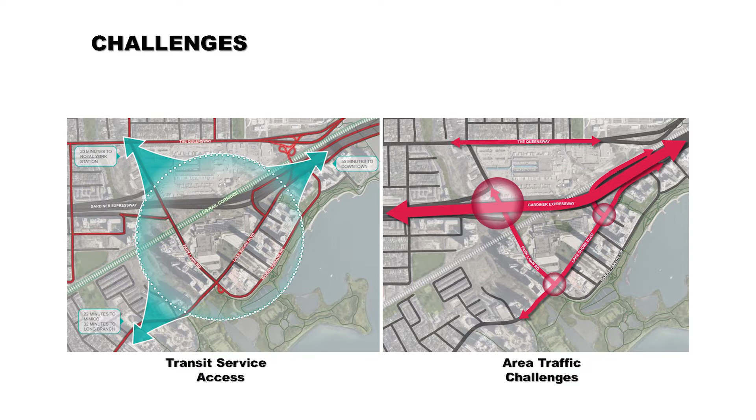We're aware of the challenges people in this area face trying to reach higher order transit, and that level of accessibility isn't probably what you would like today. We're also highly aware of the traffic congestion and issues faced in the community daily, largely because of the overspill from the Gardiner Expressway along Lakeshore and Park Lawn. These were central elements we wanted to address going forward in the master planning, because we believe those are responsibilities we need to answer, not only for the development itself, but for the community at large.

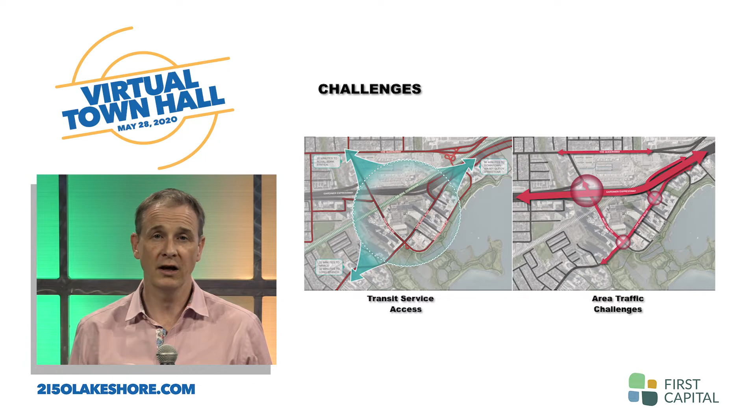So we had three big ideas we were moving forward with. We wanted to create new transit options for the neighborhood at large and for the development proposal. We believe we can do that. We wanted to address the traffic congestion in a meaningful way that actually enabled the neighborhood to be positively benefited by the interventions we could create. And lastly, we wanted to create a walkable community that could enable the whole of Humber Bay Shores to leverage the development opportunity and the mixture of uses planned within the development, on a really grassroots, walkable, on-foot basis.

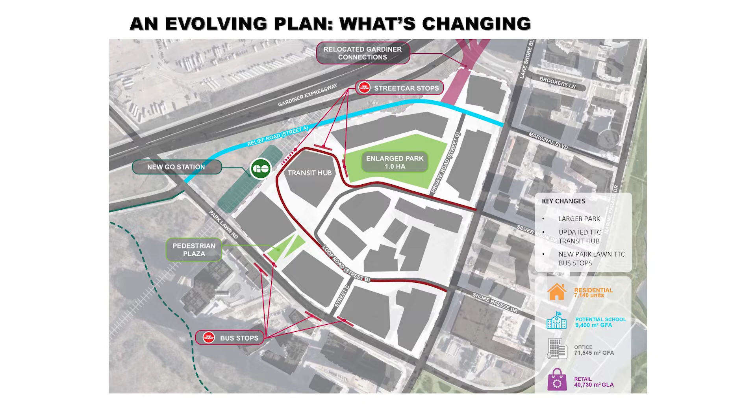So what have we been doing in the last little while? Well, the master plan has evolved. These processes do involve change and refinement. What's important from a mobility perspective is that the large, big moves I just referred to are still central to the planning of the master plan. There have been changes related to parks, changing size and growing, and other moves on the more urban design perspectives, but the elements of the mobility plan that have changed a little bit relate to some TTC work we've been engaged quite heavily with.

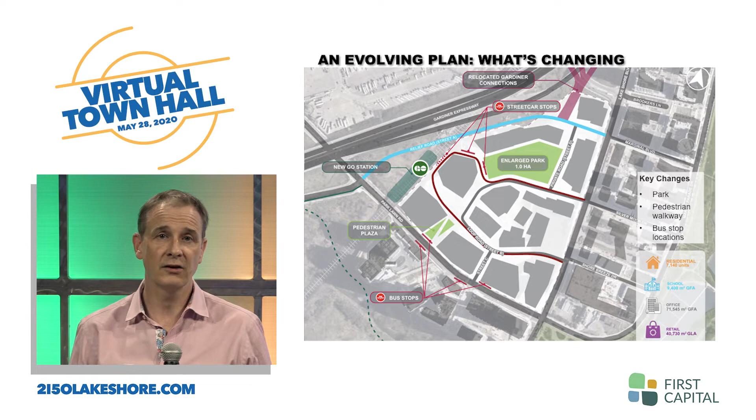Buses on Park Lawn were in a different location originally, and we've been working on how to integrate the LRT facilities into the GO Station transit hub we're proposing. Which brings me to transit, a really critical piece of the master planning effort, and central to the ideas and themes we've been working through as part of the whole mobility planning for the area as a whole.

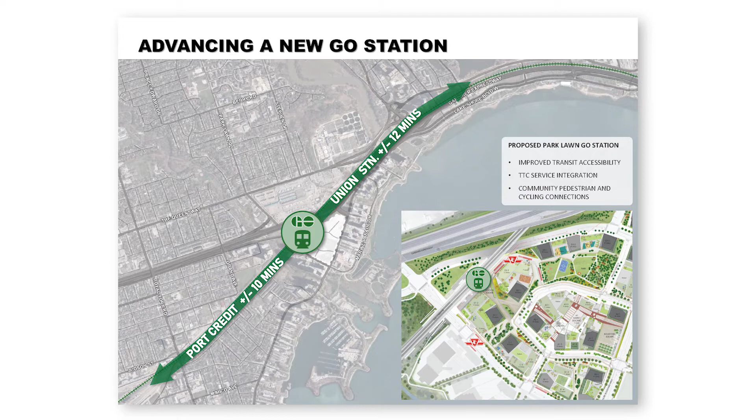We're proposing a new Park Lawn GO Station. That's a significant facility on the Lakeshore West Line, and we're working really hard with Metrolinx and the City of Toronto to bring that to reality through all the processes required to actually enact and implement such a big piece of infrastructure. But it's not just about the GO Station, of course.

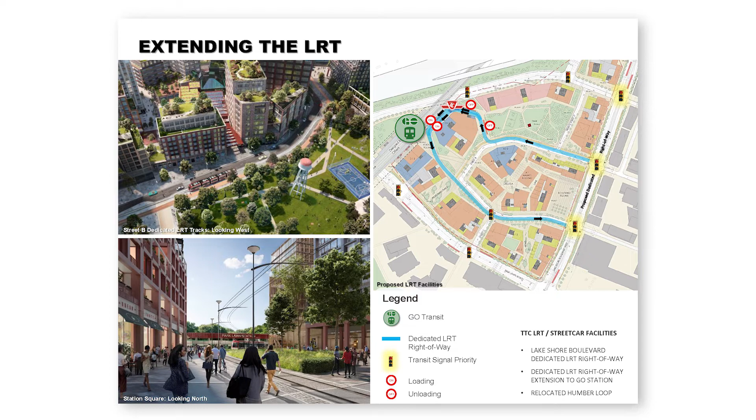We really need to be able to bring local transit and local people to that GO Station to take advantage of the great travel opportunities that system provides. Part of our master plan is to bring a dedicated LRT facility through the development plan from Lakeshore to the GO Station, providing great passenger connections between those two facilities.

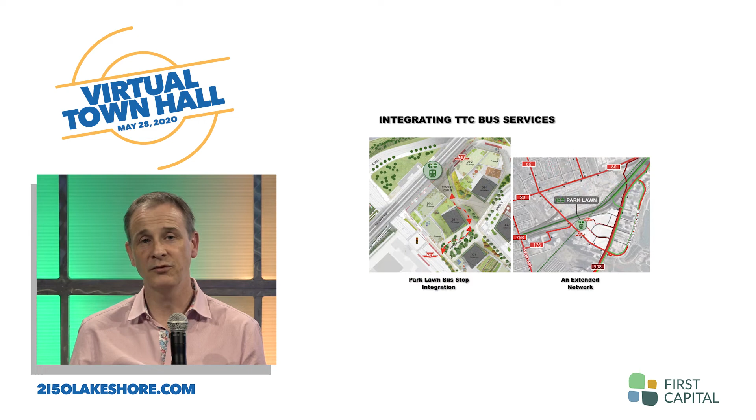And then also, of course, buses, which are an important part of serving a lot of southern Etobicoke. TTC have been highly engaged with us in providing optimal bus locations on Park Lawn Road, adjacent to the transit hub itself, providing great opportunities for passengers to connect between the GO Station and the bus network. Interesting changes as part of the master planning process have included the introduction of a pedestrian street connection that links to Station Square and between those bus stations and the main transit hub itself, providing a really great environment for that passenger transfer to occur in.

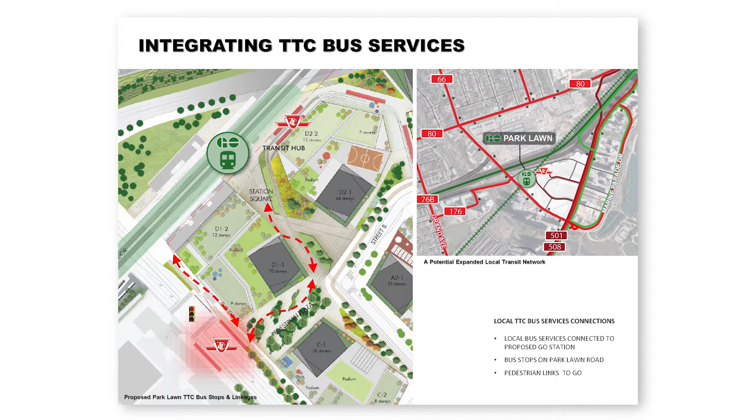Brings me to the traffic congestion. Now, this is not a new topic for this neighborhood. This is something that's been discussed the entire time I've been involved in development work down in Humber Bay Shores. This has been a top-of-mind discussion. Well, we think we've got a big proposal for this in terms of the Relief Road, now called Street A in the documentation submitted to the city.

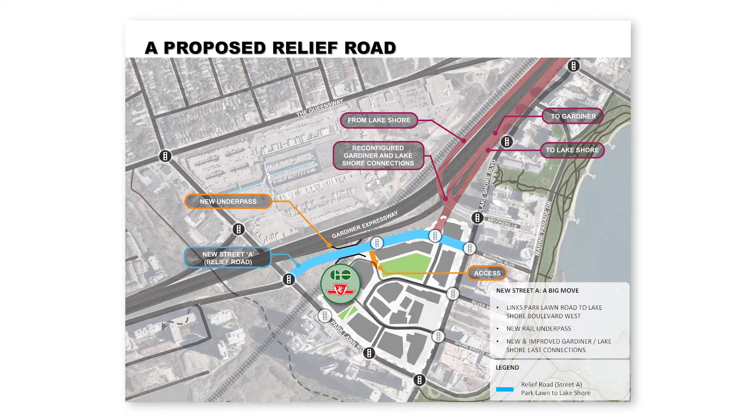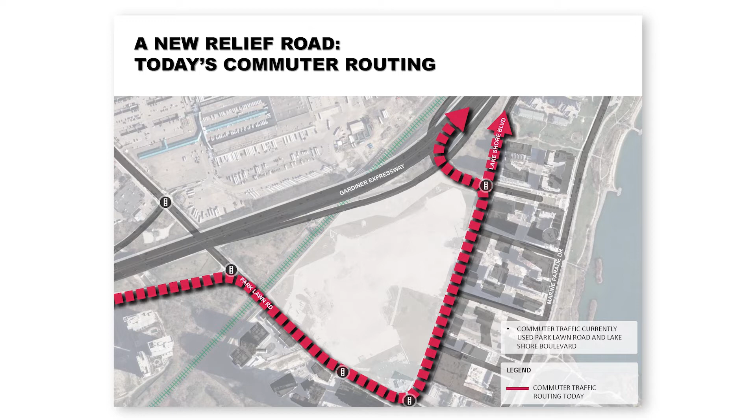Which is a major bypass in some ways. It's a major facility, a new connection linking from Park Lawn to Lake Shore Boulevard, going under the railway line, that in its essence allows for traffic currently using Lakeshore and Park Lawn to bypass pieces of the Gardiner, doing so to the detriment of the Humber Bay Shores neighborhood and the character of Park Lawn and Lakeshore itself, and allowing that same heavy commuter traffic to be routed around the rear of the north side of the development property, along the Gardiner corridor.

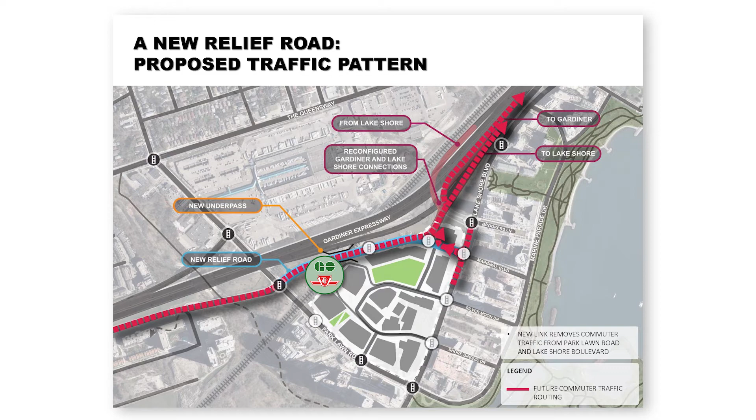And really removing them from Lakeshore and Park Lawn, where you really want to create a much more locally focused Main Street condition, lined with retail, providing for all road users, whether on a bike, a pedestrian, high use of transit, but a lesser car-oriented environment that would allow those two streets to become the spines of the Humber Bay Shores neighborhood in a way they haven't been able to this point.

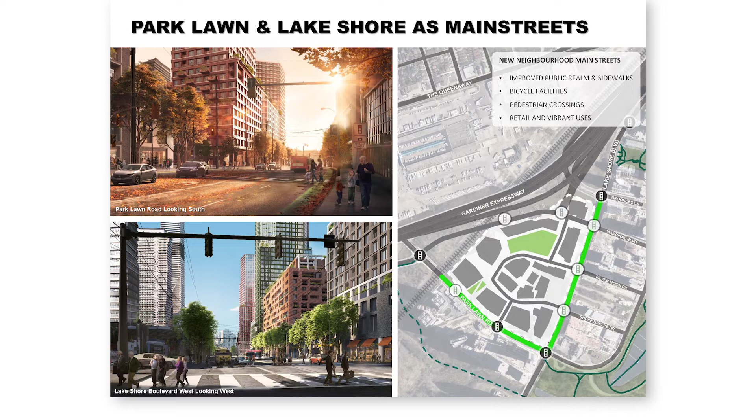That's a big focus, a big opportunity we believe, through the redevelopment of this property. There's a series of new streets being proposed as part of the development plan.

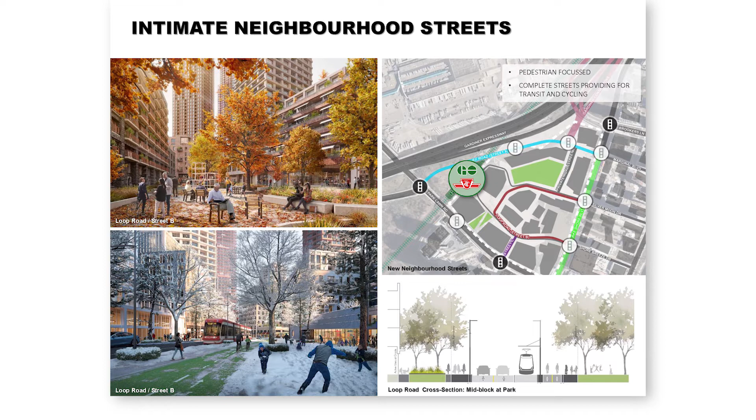These are being created as complete streets, meaning they're intimate and provide for all users, not just for the car. There'll be a limited amount of car usage on the majority of streets in the network we're proposing, but bicycle facilities, great boulevard conditions for pedestrians, and a great public realm are things we've worked hard to provide throughout the plan, to create a great walking environment for everybody who wants to walk to and from any element of the plan.

Which brings me to local community connections. This is really important from a mobility perspective when we consider the range of uses planned within the master plan. This is a highly mixed use of retail, restaurant, institutional uses, employment uses, as well as residential.

These are the heart of the project. The Galleria is a central piece of that, but it's not only for the 2150 Lakeshore property—it's for all of Humber Bay Shores. What we would really like to create is an environment where people from all over Humber Bay Shores and the development plan are able to move and walk around on foot between the places where they live and the places they want to go.

This has great benefits for the community as a whole. It plays to the theme that both Park Lawn and Lakeshore can become spine main streets of the community, and it really enables trip making to be shortened. It provides local facilities for people to take advantage of, rather than jumping in a car and going further afield to achieve the same needs. It really allows the car usage factor of a whole community to be reduced, which in the end benefits traffic congestion on the network.

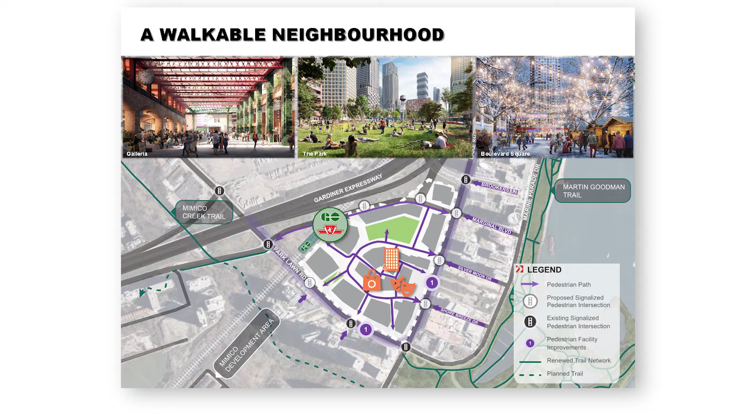These are all goals we see as great opportunities for the whole of Humber Bay Shores if we get it right. The next layer is cycling, and the ability to provide a network of cycling connections that build upon the great connections along Lake Ontario provided by the Martin Goodman Trail, along with great facilities on Lakeshore, Park Lawn, and all the streets within the development plan, to enable the same pedestrian connections to be provided on bike.

This allows people to take a bike share or their own private bike to and from a GO station, the TTC hub, and any of the retailing opportunities in the area—a really strong way to get that last mile of travel understood and provided in a great way that people will enjoy and be able to use.

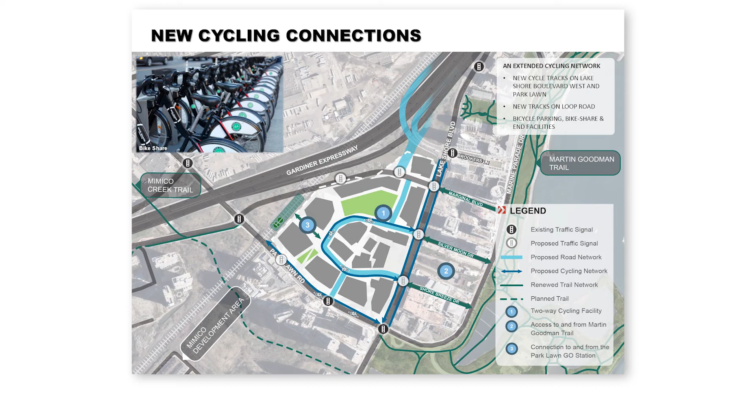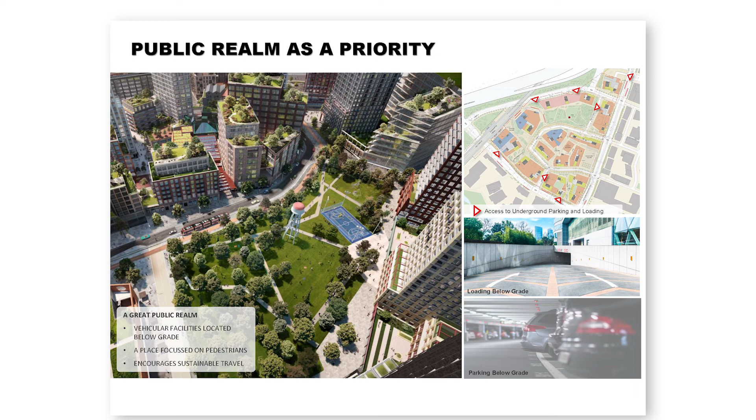Lastly, when we think about how to complement those factors, we've created through the master planning process the ability to provide all of this servicing and parking below grade. This is notable, and it's only really available to us because of the nature of the master plan—we can provide all those facilities below grade, meaning you don't see parking ramps and loading areas littered across the grade level. Again, that really enables a great public realm, a great walking environment, a great cycling environment, and a great place for people to enjoy a walk.

So when you put all that together, we end up with what we believe to be a complete mobility plan for the development site, as well as for Humber Bay Shores. The provision of great transit opportunities is going to be vital to the development plan, but also highly beneficial to the community—that's on the GO side and the TTC side, and linking those services together. That's something we're really excited about trying to make happen.

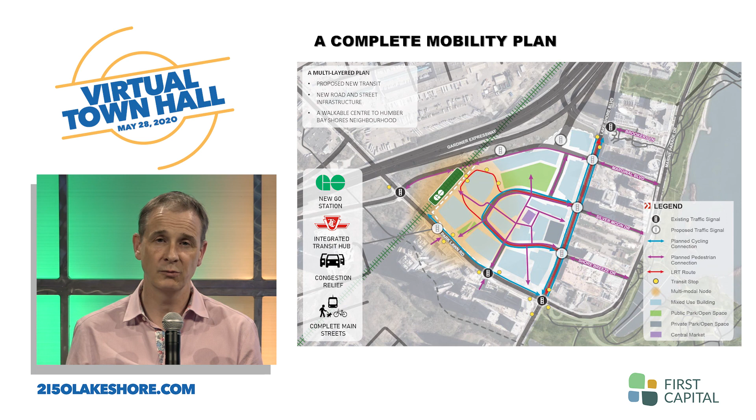There's a great public realm, pedestrian realm, and cycling story that we want to complement through this process. Of course, these topics are also going to be reviewed through the city's Transportation Master Plan and the Christie's Secondary Planning Study. Those vehicles, plus work we're doing with Metrolinx, are what will enable the big infrastructure moves to actually be made. Without those, it would be very difficult for a development like this to create that environment. In this case, there's a great coming together of processes that will allow real action to be implemented, and we look forward to working with you to make that happen.